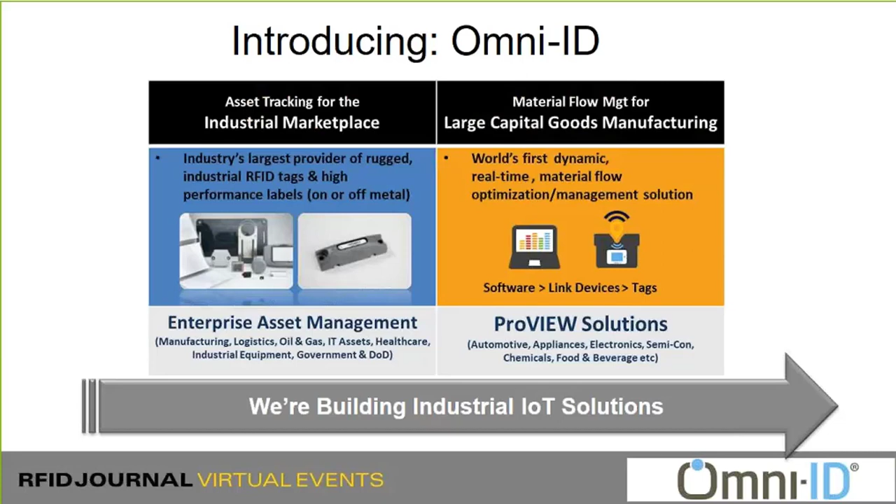So first, kind of to set the stage, while you're reading this, as we're talking together on this webinar, you've got millions of containers, carts, and sub-assemblies rotating around the world. Manufacturing is built on material flow. Many of our customers have large cap manufacturing plants that are transforming literally billions of dollars of material every year. And so when you talk about identification in manufacturing, you're often talking about material. It's really all about the material. Yes, there are cases of tracking tools, there's tracking people, there's some other things going on, but the big money is in material.

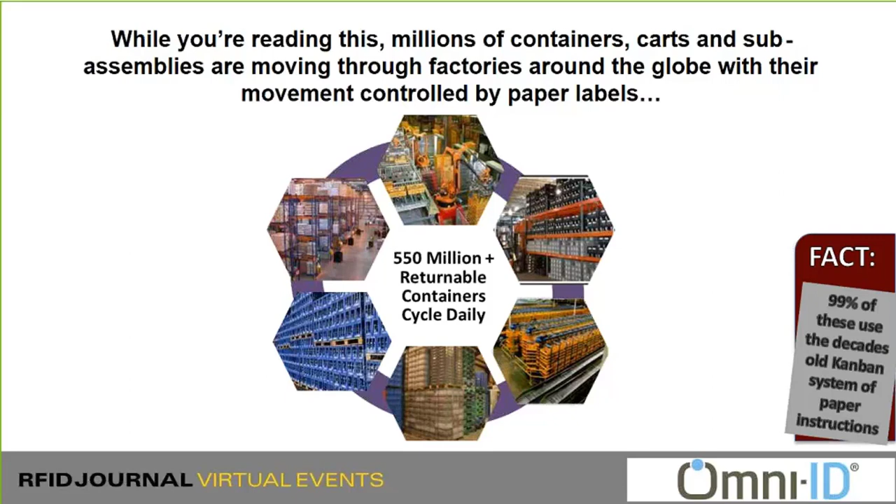And material largely flows around in returnable containers. And so one of the key things we'll talk about a lot is solving some of the container problems and getting better solutions for that.

But in addition to talking about material, the demands on you as manufacturers is changing dramatically. In the 70s, when a lot of the Kanban principles came across and we started changing manufacturing then into a much more visual system, we still had mass production, very consistent, very uniform products. You'd set up a line for car manufacturer, for instance, that line would run for 5, 6 years with no changes. Now we set up a line, it has 6 different models on it with 40 variations, and you're going to be asked to change it out for a new update in 18 months.

It's unprecedented, that amount of change and that amount of complexity, but even worse than that, your customers are now wanting to look inside your plant. They want to order that purple shag carpet, and they want to see their car being built and what stage it's at and when it will arrive at their dealer and where it is on the train. Companies like Amazon have set an expectation, and that expectation will continue to grow, that there's a full transparency through your system, that they can really understand what's going on when they make a buy, and that they can have it exactly how they want it and understand it and predict it.

That kind of environment, paper labels can't keep up to. And the old tribal knowledge practices we've had in manufacturing for a long time, even good ones like the Toyota production system and Kanban, really can't stand up to what the future is bringing us.

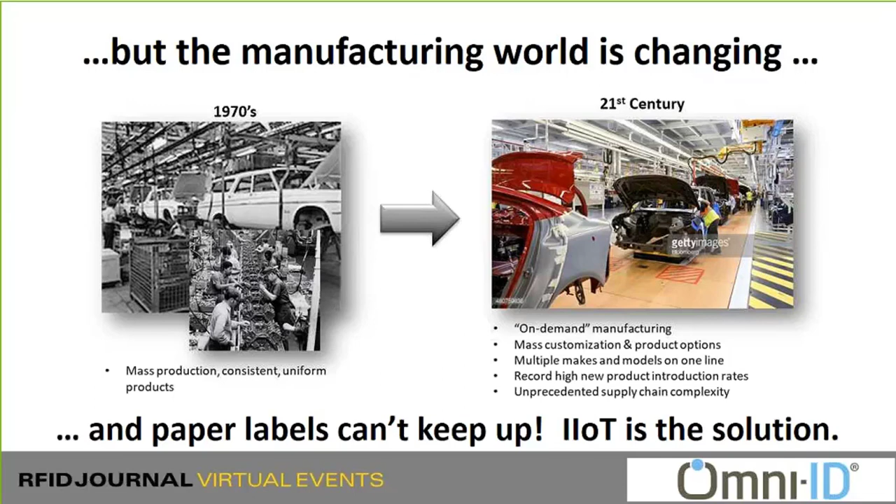And that's why so many firms are investing in industrial Internet of Things. It's clear that IoT is the solution. We have to find a way to make these materials smart, make the machines and the materials interact and the humans interact together in a way that is more autonomous and much more transparent with a much more data-rich environment. A lot of things factor into that. But I wanted to set that perspective for everyone on the call.

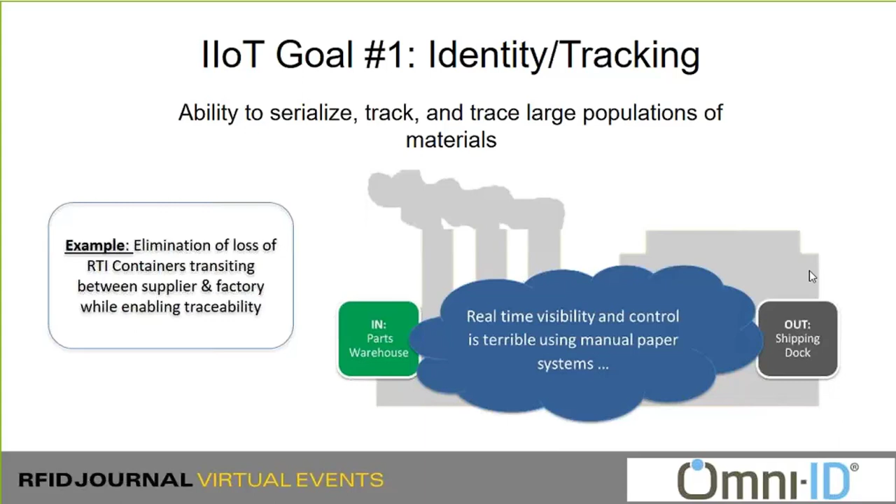So a few quick goals that everyone is talking about as we talk through it. The first IoT goal is identity and tracking. Clearly this is one that was well covered already - I think both Mark and Richard covered this in good detail. There's a lot of good reasons why you want to identify and track things: it helps you eliminate loss, it helps you optimize queues, it helps you do all sorts of interesting things in your production. But it really isn't sufficient to do everything you want to do. Still, it clearly is a key goal - you want to do identification and tracking, and obviously RFID ticks this box.

The second goal that we talk about a lot in IoT is object-specific sensing and signaling. This really relates to a number of different factors. One is that the material becomes smart enough to sense its environment - we've seen this for years in things like cold chain applications where you want to know if the temperature rose above a certain degree Celsius. But we also look at it in terms of location today. I think Richard gave a really good summary of some of the RTLS things going on in the marketplace we're participating in, trying to have a material know where it is within the process.

But all sorts of interaction is possible too. One of the great things about IoT is having devices become smarter and smarter so they can interact with your workers and with your cobots, so they can talk to each other and be very specific about their object - that object can be very specific about what needs to happen. So a goal of IoT certainly is that objects can sense and signal, they can speak and they can perceive, finding ways to interact within the process, much, much different than the paper-based systems we've had in the past.

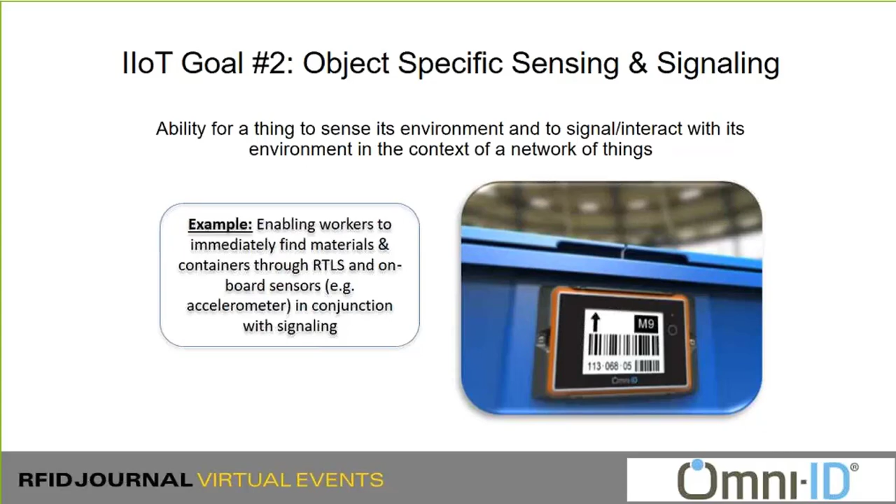A third goal is decentralization, and along with decentralization, creating reliability in the process. This is a very different way to look at your manufacturing process - being able to spread the decisions out and let devices interact, effectively have material arrive at a workstation and say 'paint me blue,' which is very different than having a demand trigger that comes from on high and demands the object be painted blue, as an example. Having that decision-making and control spread to the edge enables all sorts of things in terms of efficiency and also reliability, having the checks down low where the action actually happens.

We talk in a lot of our committees about points of interest, and I think Mark made a good point in his presentation about your RFID infrastructure serving multiple purposes. One of the purposes of a good RFID infrastructure is to serve as a trigger at a point of interest, so that as material or people or documents or machines like cobots go past certain places, those triggers can cue an action or create a system of events that will happen to realize the objective at the end of the day. So decentralization and reliability is enabled by some of the infrastructure choices we make - I'll talk about that a little further on, but it's certainly another goal of the Industrial Internet of Things consortiums and the standardization bodies we participate on.

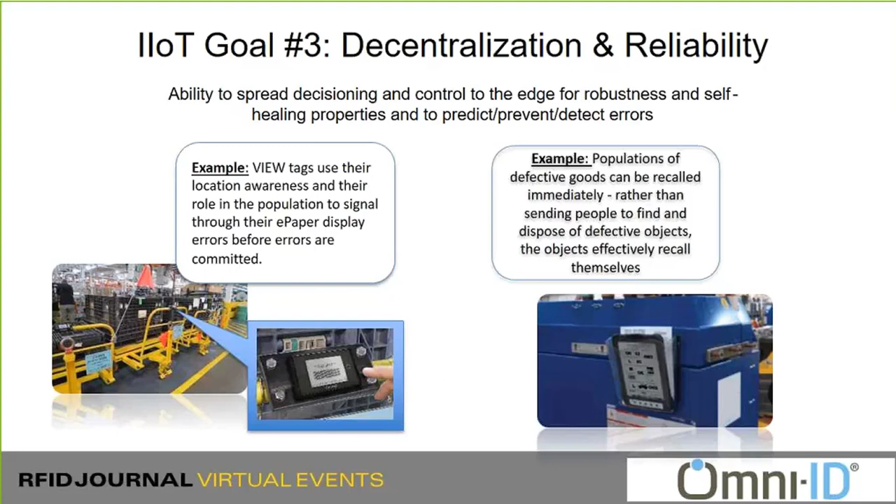A fourth goal is aggregation, and this is obvious to all of us working in manufacturing. We often have a slogan here at Omni-ID: a lot of what we do is about find the one, count the many, and measure the goal. Being able to see in this mass of material - literally millions and even billions of dollars worth of material spread throughout our organizations - where it is, how much of it we have, where it's sitting in different places and different statuses, being able to manage that flow is a daunting task. Being able to create a system in IoT that can do that for us is a key goal of the many different technologies we're developing now.

So there are algorithms being developed to reduce that complexity, a lot of queuing theory. Neural networks is a really fascinating field, beyond the scope of the call we have today, but the way we're working to aggregate and pull together this very complex dance of material, machine, and human is really an exciting part of the development of the new technology.

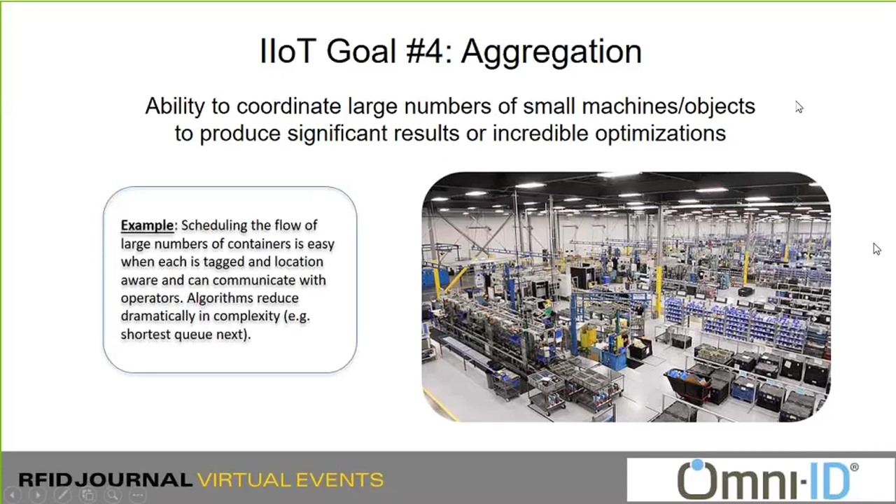And lastly - although it appears I've frozen, which means I might go spinning past having clicked it a couple of times - the fifth goal is autonomy.

Clearly, one of the reasons we want to make things smarter is that they can perform even when the system has other goals or is busy doing other things. The autonomy allows a simplification.

Whenever you bring a new technology to market, it's really challenging for people to get their heads around, and if it's too complex, it ultimately fails. IoT has to be incredibly simple. It has to be autonomous in that it can do many of the simple setup things and interactions without a lot of complex decision-making on the user's part.

This is the same for your smartwatch or your smart fridge that you're working with in IoT. It's the same on the plant floor, where you have workers and operators that aren't going to have a lot of technical background and deep expertise. So the ability to act autonomously without human intervention really extends also to the ease of use of the technology, that it can do many things on its own at a base-level functionality.

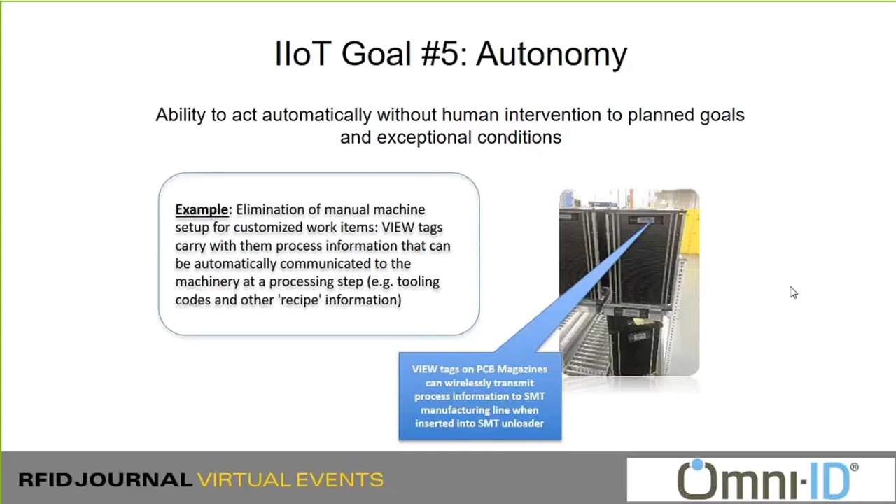Certainly, the elimination of some of the manual setup steps within the process also happens here. A lot of what we do as we consult on the different plant floors is to eliminate some of the tribal knowledge checks and balances that were there, having humans look at a paper ticket and say, is this material at the right stage? Do I need to put it in this particular oven so it can make the 4 o'clock truck? Those decisions can all be made autonomously and not involve your workers, obviously creating opportunities to use their time to do other things and creating greater reliability in the process.

So with those 5 goals in mind, I wanted to talk about how it's done and really do some more fun things like talk about applications we've done. Hopefully it gives you some ideas of how IoT is actually improving the edge and giving you transparency at the edge. So there are 2 basic parts.

First, using RFID, really the simple track and trace we talked about at the beginning of this presentation, being able to track and trace and know where things are. And then we'll talk about e-paper and industrial IoT tags for process control. This is the concept of not just passively tracking, but being able to change what happens by dynamically sending instructions and telling operators to do things differently, or telling machines to do things differently in the midst of the process. That's a really exciting part of our practice and what we're doing with many, many customers.

So first, let's talk a little bit about some of the RFID applications. One application which has always been there is storing production data through a cycle. Yes, doing this in software is certainly one way we do it, and we do it often that way. But there are some processes that are PLC controlled or increasingly robotically controlled, whether it's cobots or robots, being able to talk to the process where identifying the exact material in front of you and what needs to happen to it is an increasingly important thing.

And many manufacturers are finding storing that information directly on the object is a worthwhile exercise to be more reliable and not trust on database lookups and trying to identify the object. So for that purpose, high memory tags are used. Tags that can store production data, opcodes, parameters that might control the process, the temperature, the pressure that needs to be applied, the type of paint that needs to be used, can all be stored in the tag so that machines and operators can recognize what they need to do when it arrives at their station.

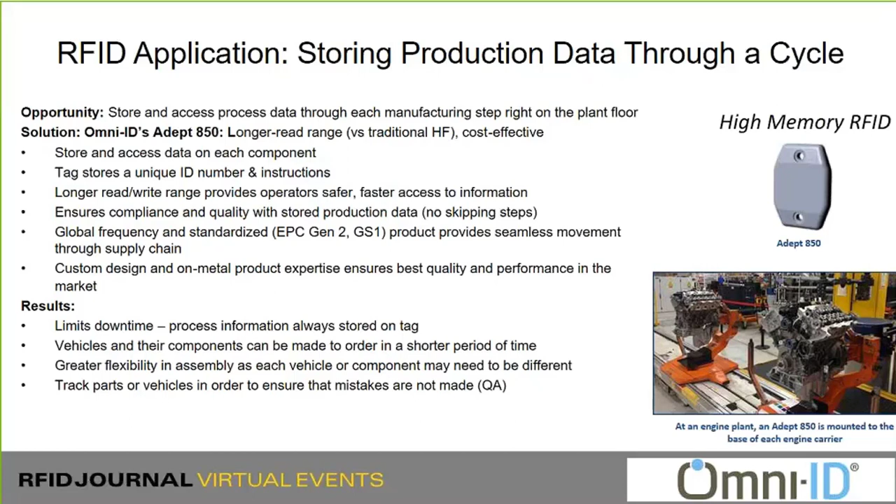So this is an example of a high memory RFID tag. We call it our Adept 850. It has 8 kilobits of data on it, much larger than a standard EPC field. And it really serves a purpose in UHF that was previously served in HF. So if you're wondering, I'm using HF RFID tags, but I really want to get more distance, be able to have a more flexible cell where I can be standing off a lot farther from the equipment versus a very close proximity HF read, you might want to look at a UHF high memory RFID tag as a new technology that can enable that for you.

Another application you'll see in this kind of flow is production history of tools and different products. This is really all about embedded RFID. You may not have been aware that you can put RFID directly into your products, even when they're heavy metal products. I show on the top right of the slide some RFID bolts. We've done a lot of RFID bolts and screws where we put a transponder directly into the head of the bolt or screw. We've even done a hitch pin, where you drop in a little ball bearing spring-loaded pin into an assembly and have that pin travel through, then take it out and reuse it on another cycle. So the idea of dropping tags easily onto your assemblies, even as they're traveling through relatively harsh, heavy metal environments with a lot of stress or impact, is very possible today, whereas 10 years ago it certainly was not. So being able to keep the production history and track your tools and equipment is possible, and we wanted to make sure you're aware of that as you think about tracking applications.

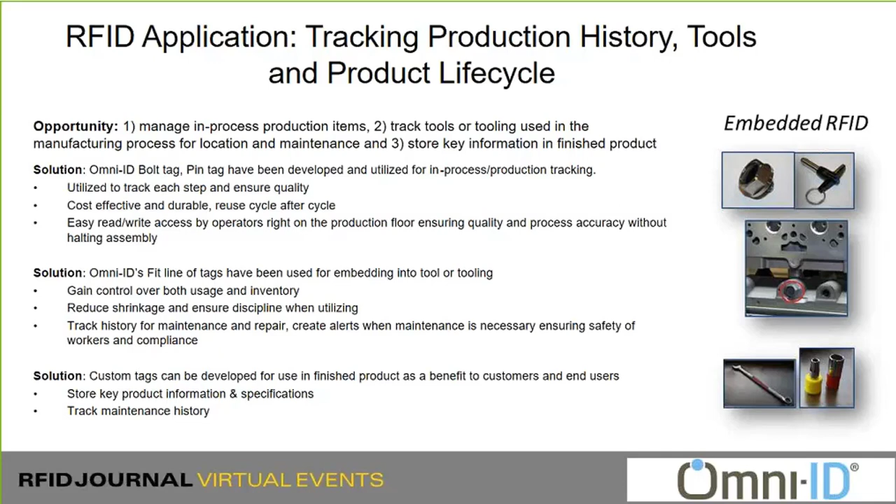Another one we get asked about all the time is high temperature process exposure, whether it's paint booths or vulcanization. This is a huge area - we sell a lot of high temperature RFID tags, whether they're hard tags like this ceramic or polyamide style, or paper tags and labels. We have a wide range of high temperature tags doing 225, 250 C or even higher. You have opportunities to take care of that through your process. So secure data in those high temperatures is now possible, where again 10 years ago it was a dream, and you really couldn't have anything that would survive reliably thousands of cycles at high temperatures like we can today.

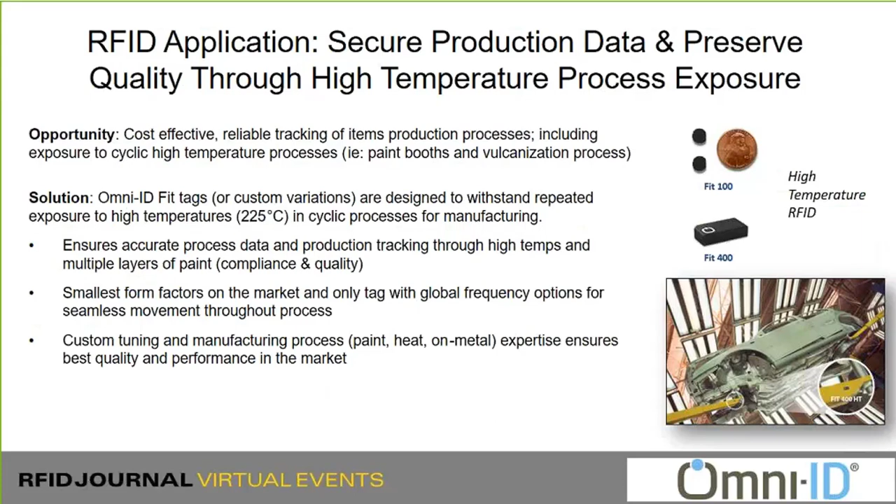Another application, if you're in manufacturing, is RTI management. I think Mark talked about it a little bit in his section as well. Losing these containers, keeping track of them, knowing what's in them, is a huge piece of what all of us worry about. There's a lot of value in the container. So the key is to have an RFID tag that is cost-effective but also fits the type of container you're on. It's very different to slap a label onto a plastic bin versus onto a metal rack that's going into the stamping machine, picking up side panels and things. So there's a wide range, from harsh environment tags made out of polycarbonates - very strong - or even steel tags, right down to simple labels that enable you to track any kind of RTI you might have. So if you've ever worried about that, don't. There's certainly a tag for every case, giving you the ability to track those containers in an efficient process flow.

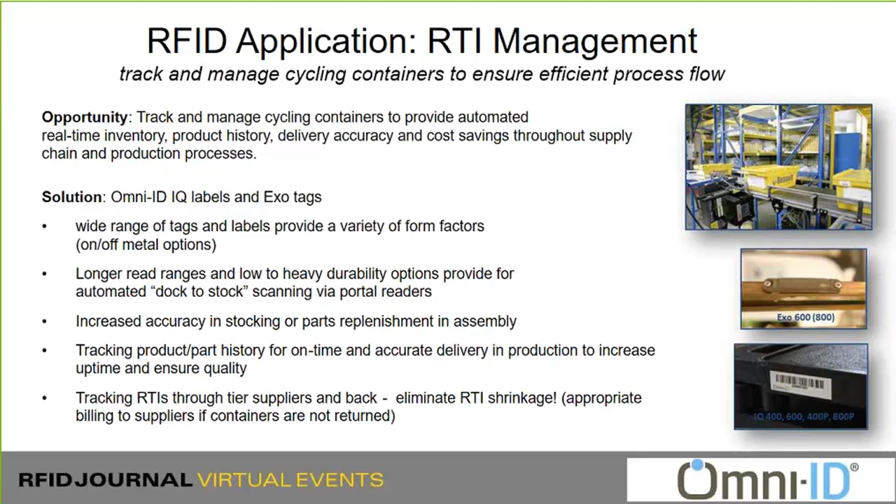Lastly, finished goods are a key topic here too. We certainly do a lot more now in finished goods than we ever have before. You may not be surprised to know that vehicles, for instance, are getting more and more RFID tags embedded directly into them - into the frames, into the seats, into key components such as airbags. We did a count on one of our customers, and 23 RFID tags were actually shipping inside that car, across different components and assemblies. So increasingly we're seeing finished goods having those tags. Much like Mark talked about multi-purpose use, you can use those finished good tags for a lot of different things - your QA check, your cleaning process, your load process when loading the train to go to the dealer, your final packaging steps to disposition it, or even reverse logistics if you're receiving back returns or warranty claims. There are a lot of things you manufacture where applying a tag strategically into your finished goods can make your process more efficient, and I think you should consider that.

Again, much like we talked about in the previous slide, tags don't have to be obvious. There are a lot of ways to put them into your product in a way that won't affect its use, but will give you all the benefits of RF-enabled identification from a distance that will help streamline your process. So we do a lot of finished good tracking.

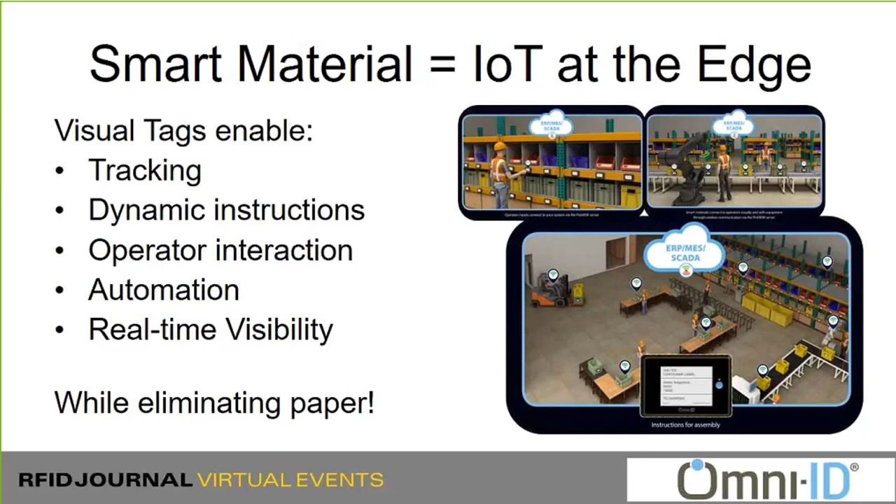I talk to so many of our customers about how much it costs to have travelers, paper worksheets, stickers, labels, cards, maintaining all those printers, bringing paper to the printers, bringing toner to the printers. There's an immediate cost savings just by eliminating all that paper. But the true benefit is all of the data and the process efficiencies you get. But it's nice to have a hard cost like paper to take off of the books as well, and it certainly does do that.

So a few how it works. Work instructions is a good example. This is an application that we do a lot of with visual tags. You may have a process in your factory where you send a paper sheet, or what we call a traveler, with your goods. We see in the picture here a skid full of valves, and each of those valves has a build sheet that tells the operator on the line what to do with it next. Seat an O-ring, couple it onto this, test it for pressure. Whatever the instruction is, it comes with that traveler.

Imagine this now having an intelligent transponder on it, where as it goes station to station, the worker can see it dynamically and can see those instructions. Yes, it eliminates the paper, but it also means now you see where the material is at any stage in the process. It allows you to be more explicit about instructions. So say you had a problem yesterday with seating the O-ring in that valve, and with it not being seated correctly, you're failing the pressure test at workstation 23.

So how about at the O-ring station, now you put a picture up on the e-display, and it says to that worker, make sure you seat the O-ring this way, and it shows them a picture, and it also says press the button to confirm that you did it. Imagine how that impacts your quality the next day, and how you're able to teach perhaps a line that was doing something wrong a better way. That's an example of electronic work instructions being much more clear and improving your process.

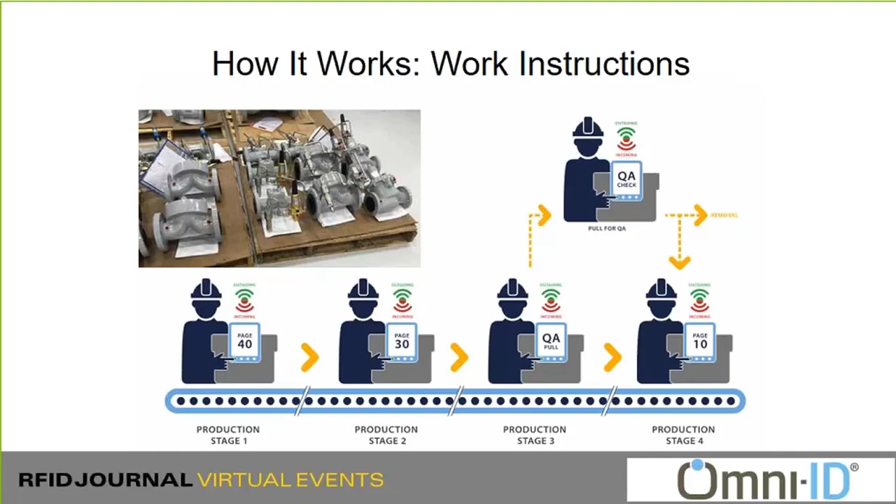But in addition to that, you can capture the as-built instruction. Because it's an intelligent tag going through, not a piece of paper, you know exactly when it went through the workstation, who worked on it, and can capture all of that data in real time if your customers are looking for that kind of transparency. And increasingly, they are.

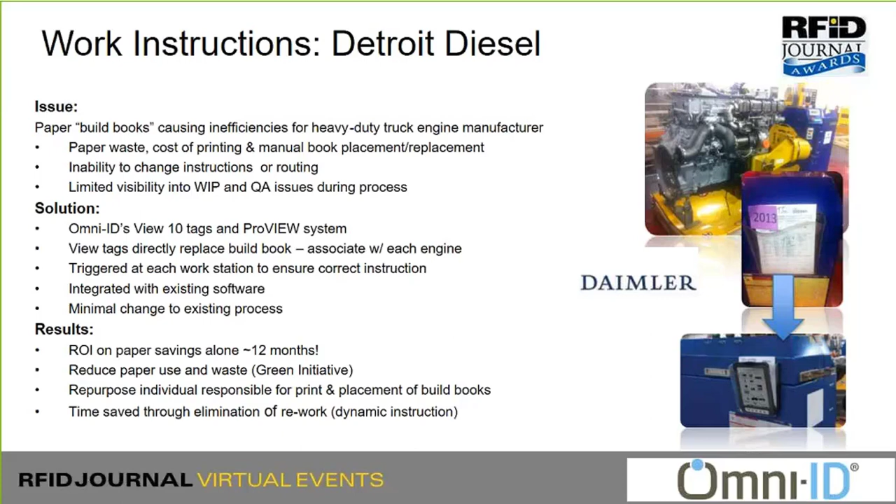Another good example of work instructions, this is a company we worked with in Detroit Diesel, a Daimler facility. They build large engines for trucks. They had a very large build book, many, many pages, that would detail exactly how the engine needed to be built. By replacing that book with an electronic visual tag, we tracked the engine's progress through the different build stations, which was many hundreds of yards long, and allowed us to get rid of the cost of the paper, but also dynamically control what happens with that engine. In many cases, adjustments are made, shims are added, and these electronic work instructions are a much more efficient way than the static paper to do all the markups.

Another application you do with visual tags is picking. I'm sure many of you have picking operations in your plants. It's a fundamental thing that happens in almost every manufacturing facility to gather up the materials for the production run and feed the main line. There are many systems that historically have been there for picking. Everything from the traditional sheet of paper where you get a pick list printed at a printer and the picker just walks in and uses the list just like a shopping list and checks off gathering up the material. Certainly pick-to-light systems have been a big deal for a long time, and now pick-to-voice or pick-to-sound is out there doing a lot of things.

And now not only do you have the ability to see that that's where I'm supposed to pick, you can give instructions. Maybe you're picking a quantity of 3 instead of a quantity of 1. Or maybe you've got a pick cart that has slots or that's sequenced. And when he picks those 3 parts, he has to put them in a very specific order on the pick cart. Or he has to sequence them on a stack on top of his shopping cart. All of those things are possible with a visual tag that aren't possible in other systems, or at least aren't easy to do in other systems.

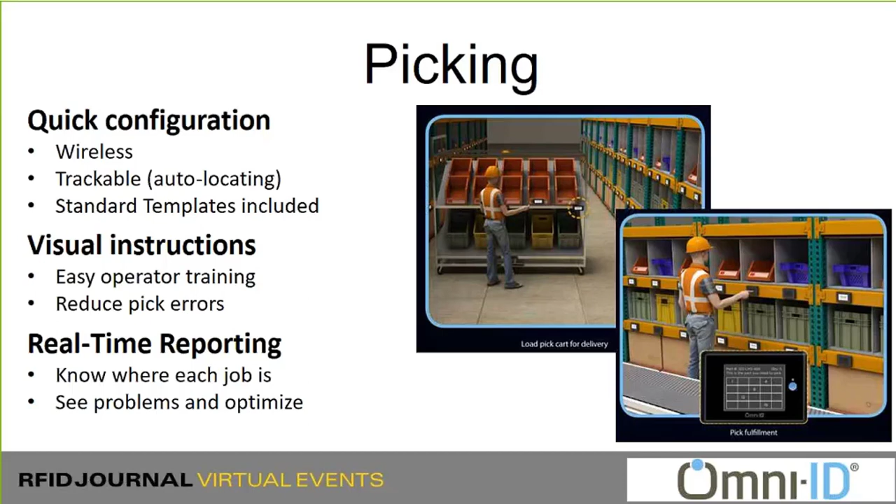Then, of course, you get the real-time reporting aspect where you'll really see in real time where everything is and be able to track. So picking is a great candidate for using this new IoT technology of visual tagging. It really does save a lot of money and streamline the process. One that's very related to that is replenishment, and here's where it works a little bit hand-in-hand. So again, replenishment's a key feature, bringing goods from your warehouse to your line side or into your picking supermarket.

Many customers use a kind of go-and-see methodology where you put up flags, or workers just go and look to see if the bins are getting empty, and they go bring the replenishment. Some use call buttons where there might be a button there to press, but the call button really is just that, like a doorbell, to say that I see that I'm empty. Visual tags allow you to give better instructions and dynamically reconfigure those replenishment cells. You can change part numbers, move the part numbers around just like you do in a supermarket.

The call can still be a push button, or it can be a sensor. The tags have sensors built into them and have sensor attachments that can be added to them to allow them to sense when there's not a bin in the area or not a second or a third bin if you're using a 2 or 3 bin system. And so that call goes automatically.

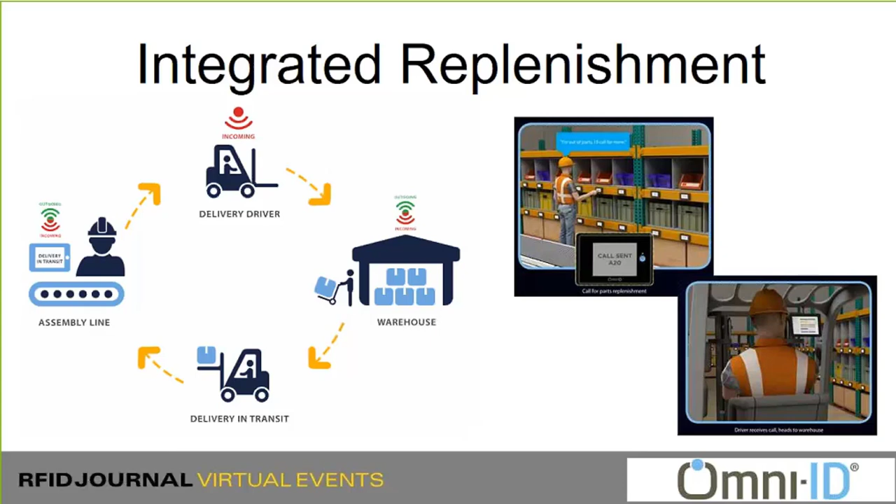Not only does the call go automatically to the replenishment operator who's driving the tug or driving the high-low, but you get a message for the operator to say the call's been sent, as you see in the little thumbnail that I have here on the slide. Visual tagging provides the transparency in the process that reassures your operator that everything's going as it should be and keeps everything running properly. The elimination of errors and downtime is tremendous using a visual system, just like we found out in the 70s when we were using paper Kanban cards.

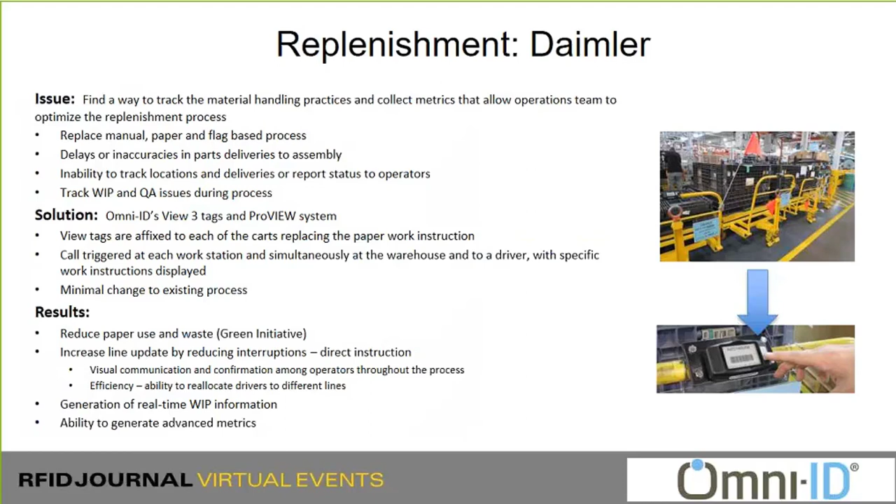Again, another good case study here with Daimler, who used our replenishment system, calling for parts. They used to use little orange flags like you see in the top picture, and they moved over to a fully electronic visual tag, and the savings have been tremendous. Again, I won't dwell on it. There's a great application story on our website if you want to read in more detail about this particular installation, as we're getting a little short on time.

So, just in conclusion to talk about this second phase here, well, RFID does a great job of track and trace, and certainly that can be your only goal of your project. You may decide all you need is tracking and tracing and ability to kind of identify materials as they flow through your process. I hope you know from this presentation that RFID is more capable than it's ever been. It's more reliable than it's ever been. We're able to put it into tough environments like heat or directly embedded into metal. So if you're looking for a track and trace project, you really should have a look at RFID. It's come a long way. It's cheaper and more reliable than it ever has been.

If you're looking to move into IoT and really take advantage of some of the autonomous, self-regulating, communicating with your workers kind of technologies, you should look at perhaps more intelligent transponders, intelligent tags that can also be tracked and traced, but can also now interact with your workers and your machines in a very interesting way. There's great efficiencies in using these wireless visual tagging systems through many of your processes, and rather than just track and trace, you can dynamically control your process, change instructions, change the goods flow through your organization in real time. And that's a huge jump and really is the Industry 4.0 or next generation of industrial manufacturing.